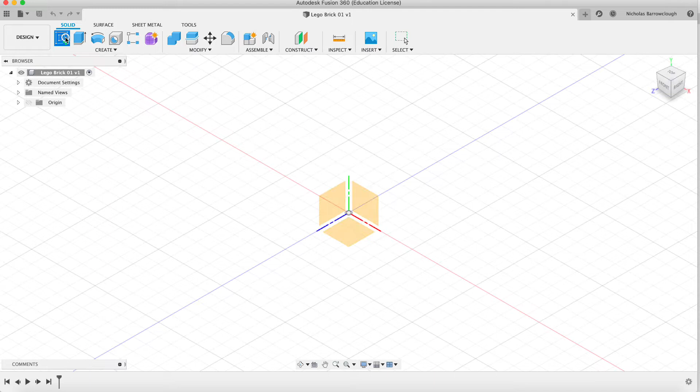So check the dimension 31.8 by 15.8. So we start with creating a sketch on our origin plane here, 31.8 by 15.8. And there we have our beginning sketch.

We've input the dimensions. You'll see it automatically dimensions it there for us. And this allows us to then do parametric modeling, because we can go in and we can edit these dimensions, and whatever we edit, it's going to have knock-on effects down the line. It's going to adjust everything else, so long as it's properly constrained and referenced here in the drawing. And you'll see what I mean by that as we go along.

So next thing we're going to need to do is position our circle here. So these are spaced at 8 millimeters by 8 millimeters. They are 4.8 in diameter, and it is 3.9 from the edge. So that stands to reason that if this is the center line here, we go 4 millimeters up and 3.9 in from the edge.

So we'll put some construction lines in. First of all, a center line going right down the middle here, like so, and we will turn this into a construction line. And then we need to go 4 millimeters one way and 3.9 the other. Actually, we don't need to make this all the way, let's just change this. We only need to go in by 3.9, which is the distance from the edge there, and then 4 millimeters the other direction, just to position this.

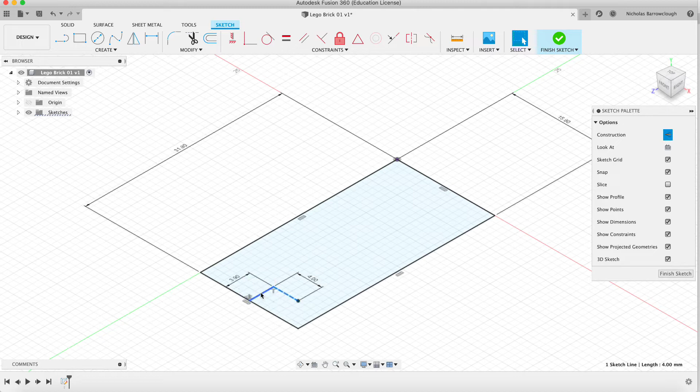So we don't need the construction line to go all the way, just from the center point here, and we go 3.9 in, and we go 4 up. We'll go the other way so it doesn't interfere with our dimension. It's fine, we just need the position of one of these. So we can turn these into construction lines also.

And we'll stick our circle here, and the diameter of that is 4.8. So we come over here and we go 4.8. There we have our first one positioned.

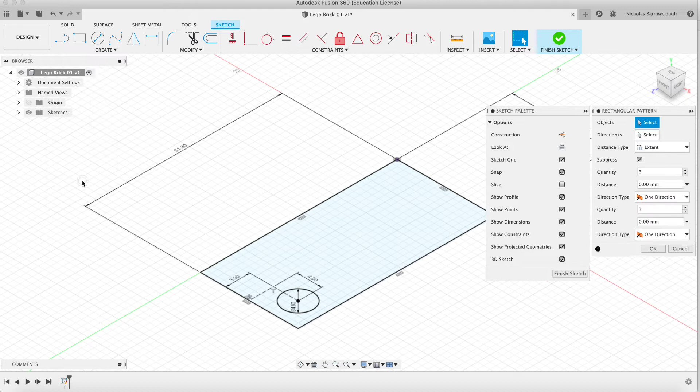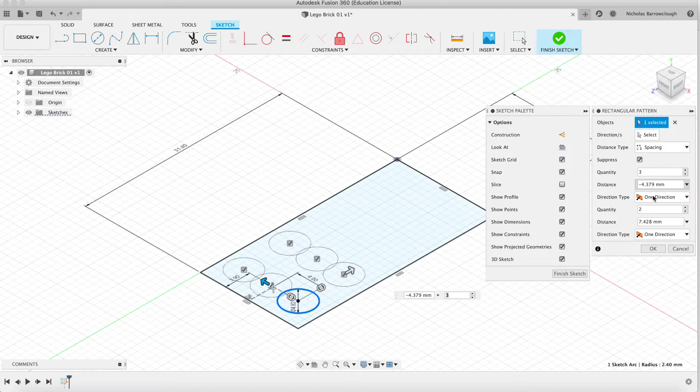Now we don't need to do this many times. We can use the rectangular pattern. We'll select this object and we choose the amount of times we want to do it. So we change our distance type to spacing, and we drag this out in this direction and in that direction. So actually we're going to want 2. Nope, other way, it's going to be 4 by 2.

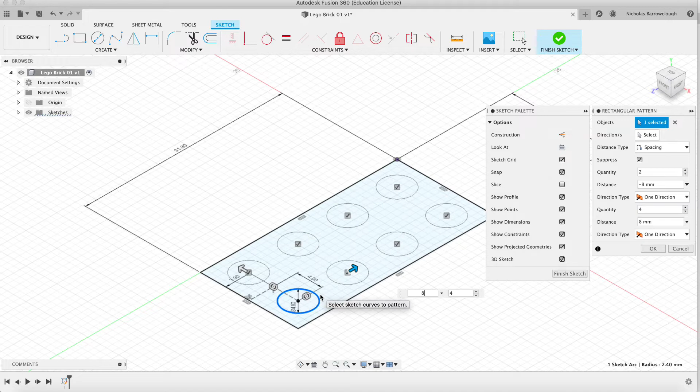We need to input the spacing. So the spacing between our circles is 8 millimeter center points. So this is going to be -8, and this dimension will be 8. Okay, so there we have everything spaced as we want it to be and positioned appropriately, the correct diameters.

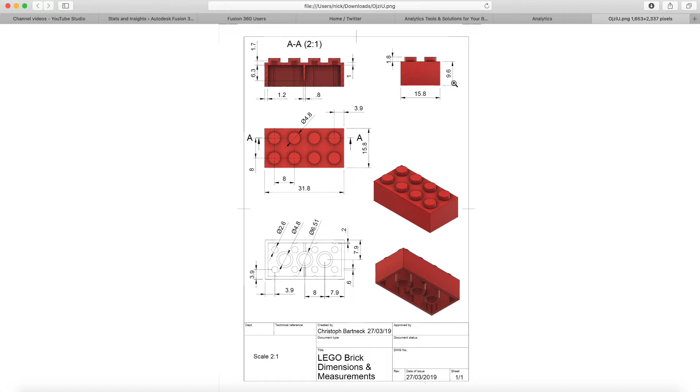Okay, so next step. Now we've basically drawn this, we are good. We're going to be extruding it up. Okay, so our height of our brick is 9.6, that's our height here. So we will go to Finish Sketch, Extrude, and we're going to extrude everything up here by 9.6. Done.

Now, I want to keep the sketch visible, because the next thing that we need to do is do this part here. Now this comes up by 1.8, but it should start at 9.6. Okay, so we're going to use our same sketch.

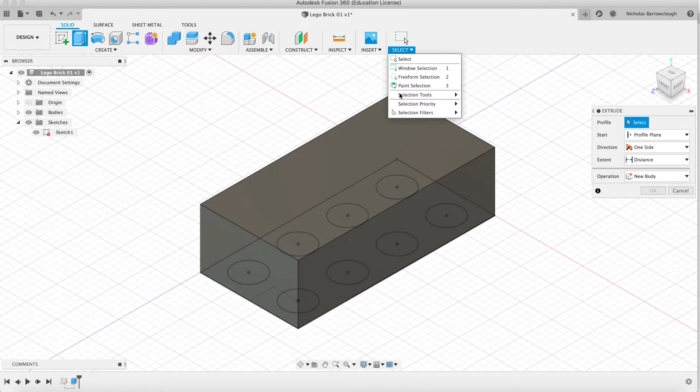Go to our selection filters and we turn off select all and just sketch profiles. So we're going to go through and select only these.

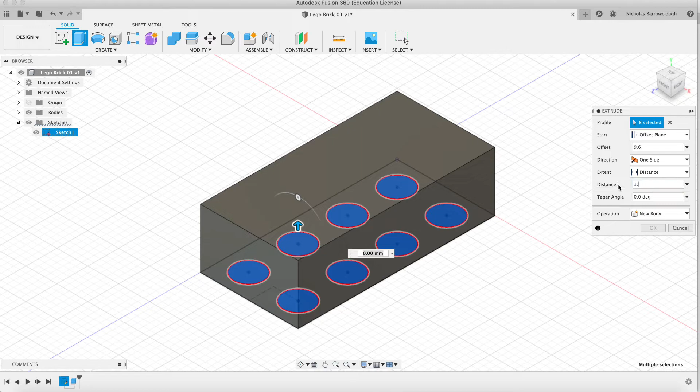We will choose to start at an offset plane, and the offset will be 9.6, and our distance will be 1.8. So that means we are not going to start extruding until this top surface here, and they're going to come up 1.8 in height. And we want join, okay?

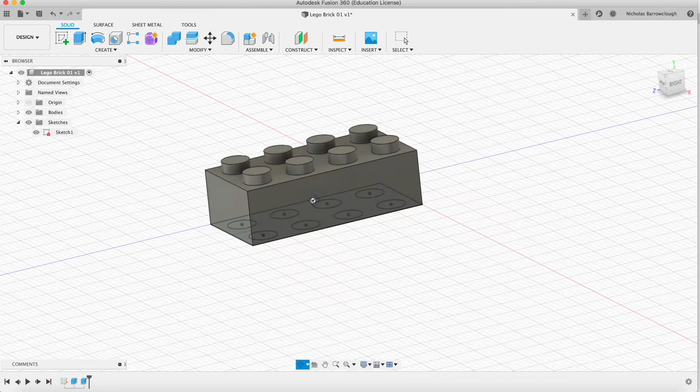Done. There's our Lego brick. Look familiar from when you were a kid? I hope so. Okay, so what other dimensions do we have to deal with here? So we've done our height, we've got our width, that's all correct.

We are going to be wanting to go from the inside measurements. Our wall thickness there is 1.2. Okay, so the first thing that we're going to want to do is use the shell command and shell this whole brick out with a wall thickness of 1.2. That's going to be our first thing to do.

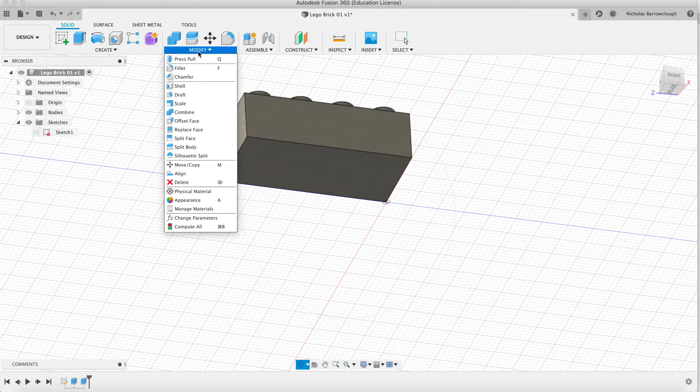So how do we do that? We flip this over, we rotate around, and we will go to our modify tool, and we'll go to shell. We select this face, that's the one we're going to remove, and our thickness is 1.2, and we go OK, and now we have a nicely shelled brick. See that?

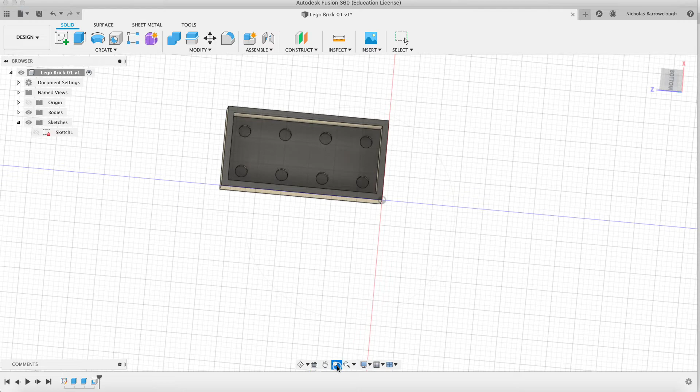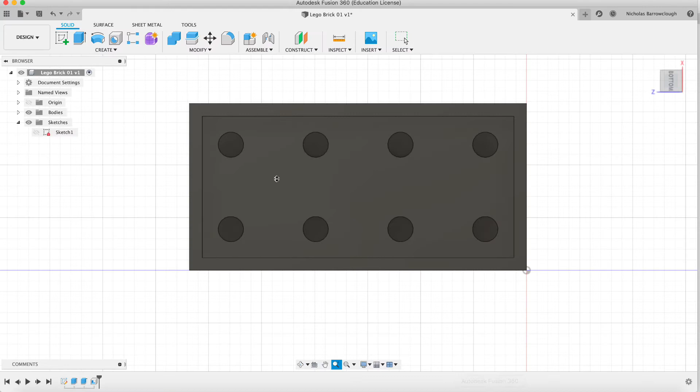And if this has been done correctly, our hole diameter inside here I think will also be correct. Maybe, let's have a look. So that's 1.2 thick. Our diameter was 4.8. If you take off 2.4, it should be a 2.4 diameter inside. Let's have a look at this circle here, and you see the diameter there is 2.4. So there we go. That is all correct. Okay, there's our basics of our Lego brick there.

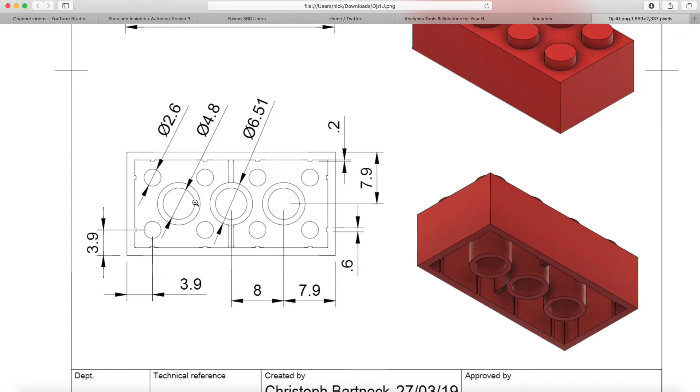Now, inside of the brick we have some other elements. Okay, so we have these that come down. If we zoom in there, you'll see we've got 1, 2, 3 circles coming down, and these have a diameter internal of 4.8, because these are going to fit in between here, when these bricks are interlocked.

Alright, so first thing, we're going to need to draw these 3 circles in their correct positions. 7.9, and 7.9 is going to be the position of our first one. Okay, so what I'm going to do is put it onto this same sketch.

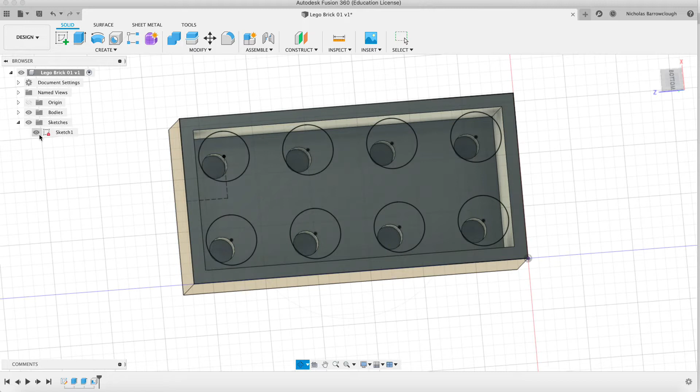So we edit this sketch, and I'm going to put it at this side here. So we're going to need to create a new construction line, and this construction line will start in the center point and will come out 7.9. 7.9 in from the edge, 7.9 to the middle. Okay, so we just find our center line here.

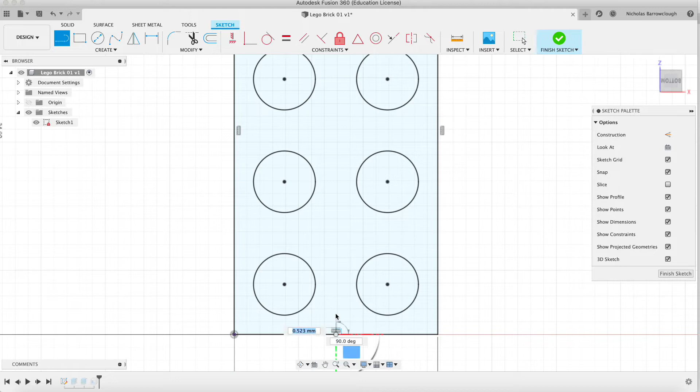And we come in 7.9, and make this a construction line. And now we need a circle which has an outer diameter of 6.51, okay, and then inner diameter 4.8. So 6.51 for the outer, 4.8 for the inner. So we'll start with the outer circle. That's 6.51.

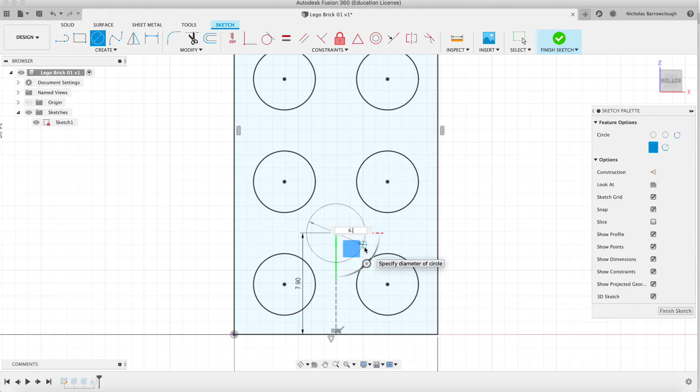The inner diameter is 4.8. And you'll see how that outer diameter just kisses the tangent of these. That will be a perfect fit.

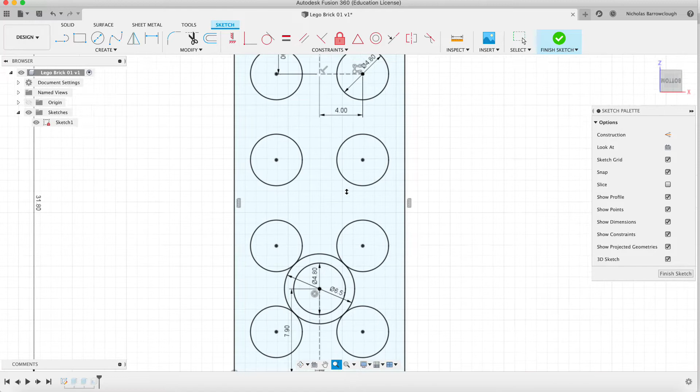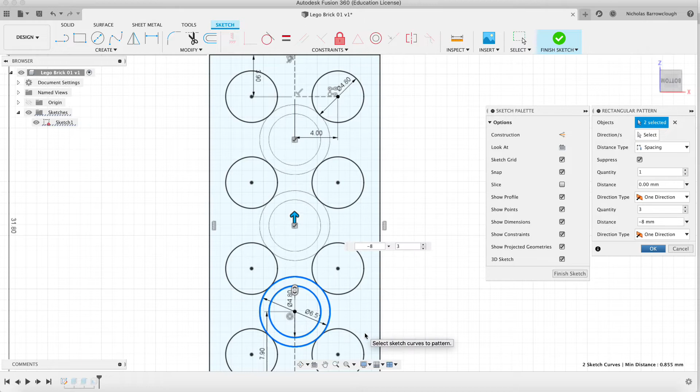Okay, now this needs to be copied 3 times. So we will create a rectangular pattern. We're going to want both of these, and our spacing should be 7.9. Okay, no, 8. 8 will be the spacing. Okay, so we set this spacing to -8. Everything should line up properly for us.

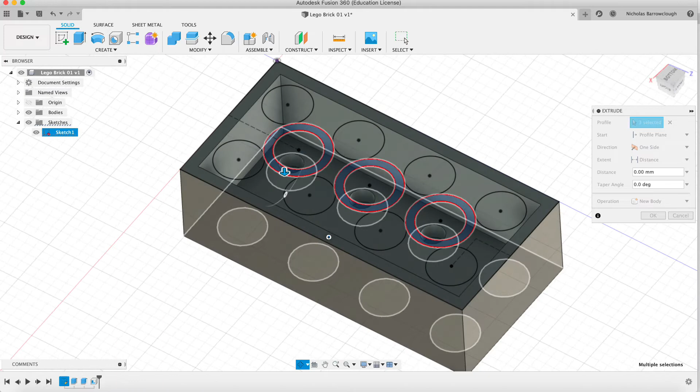Okay, so we finished the sketch. We're going to grab this, this, and this, and it's going to be extruded. If we turn off sketch profiles, it's going to be extruded as far as this face here, and it's join. Okay, now we can hide our sketch. There we have the inside of our Lego brick.

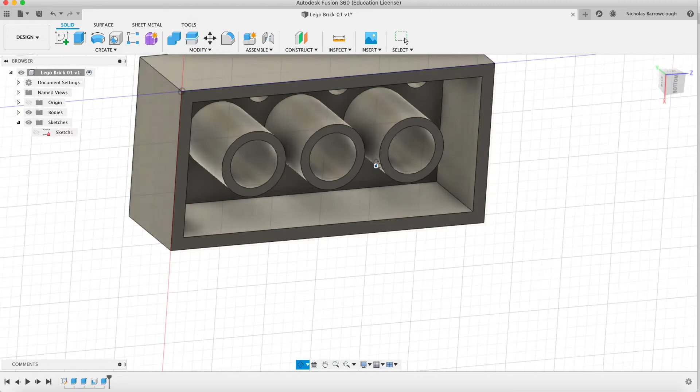So you see, all of this is being done from one sketch, so we're not cluttering up our workspace too much, but one sketch with everything we need on it. So, in the middle here, we have this little tab that comes out and joins, and its thickness, we're not really given. I don't see the measurement of the thickness of that anywhere. So that might be the one dimension that we're kind of missing here.

But I will hazard a guess. Our wall thickness was 1.2, and yeah, we do have the measurement of that here. It's 0.8. Excellent. Okay, so 0.8. Half of 0.8 would be 0.4.

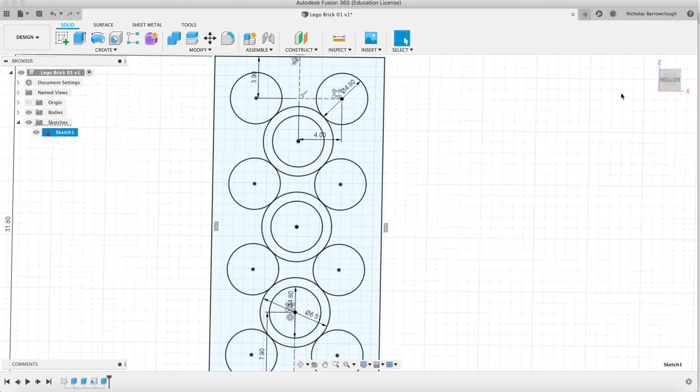So we go back to our sketch, edit this again. Construction line out to the edge here, another on the other side. And now we will offset 0.4 in that direction.

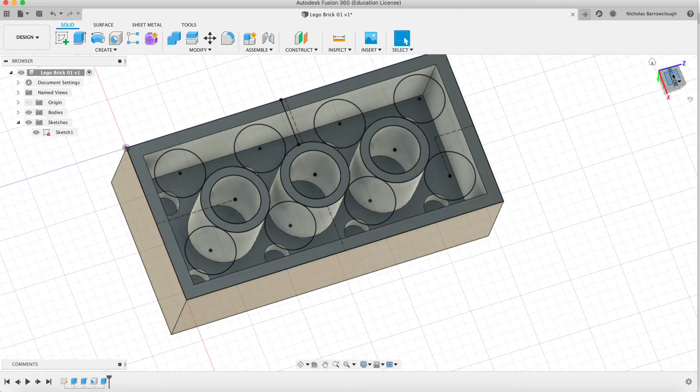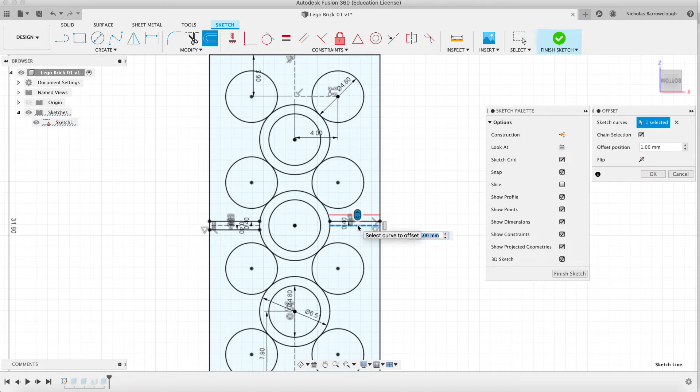Whoops, I shouldn't have gone to finish sketch, sorry about that. And minus 0.4 in the other direction. And then the same on this side. 0.4 and minus 0.4 in the other direction.

Okay, and you'll see that when we offset this, because our construction line is close to the tangent there, it hasn't joined. You notice? Because it's just offset this line exactly as it is. So we need to make a little adjustment here.

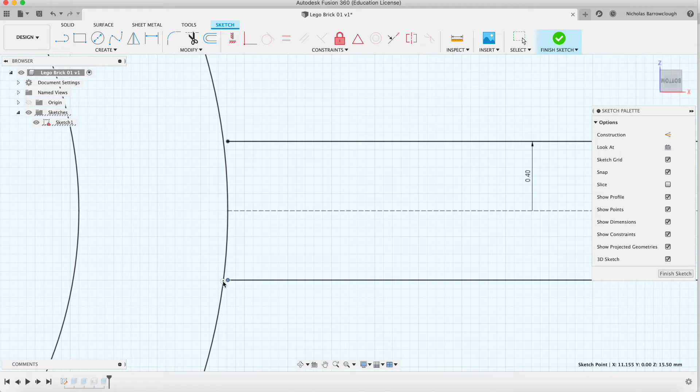Drag this if we can. Delete coincident. And we drag that down to the tangent here. Okay?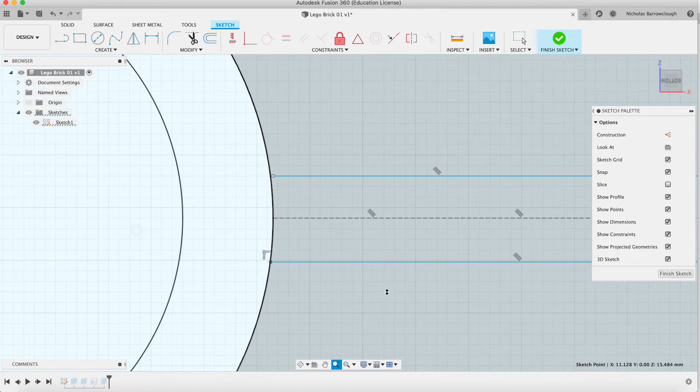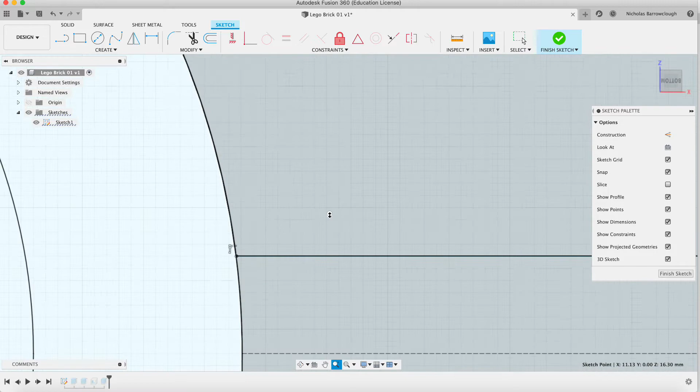And the same on this side. Delete the coincident, and we'll drag that to there. Now it's properly constrained, okay? Join to the tangent on that side. And then we do the same on this side.

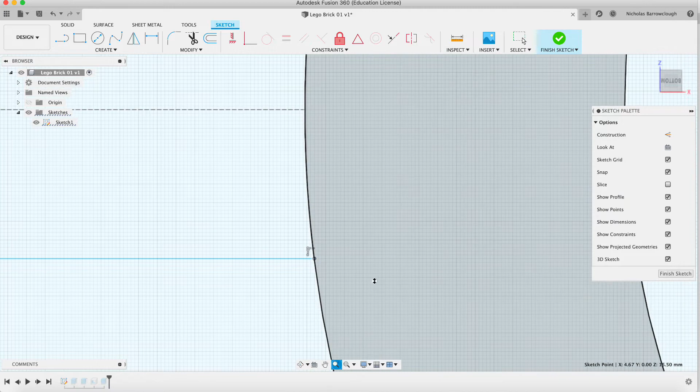Delete coincident, drag that out to there, and the same here. Okay, so that being done, finish sketch.

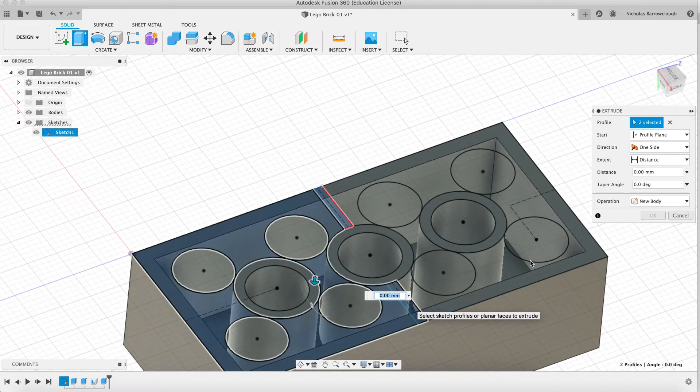Now I can grab this, see here, I can extrude this down, turn off sketch profiles, so I can go as far as that surface there, and it will be joined, not cut, okay?

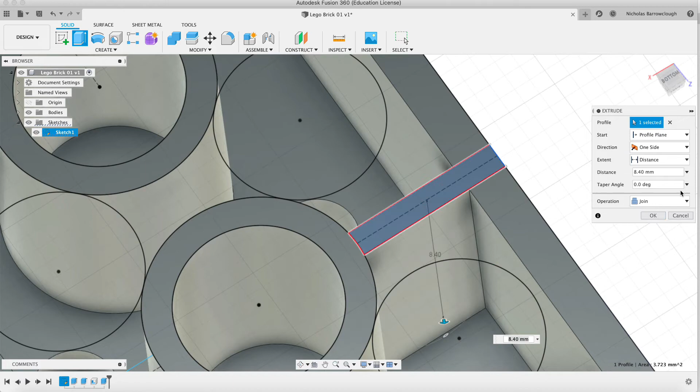And then the same on this side. Seem to have a slight problem here with the sketch. Let's go back in and edit the sketch again.

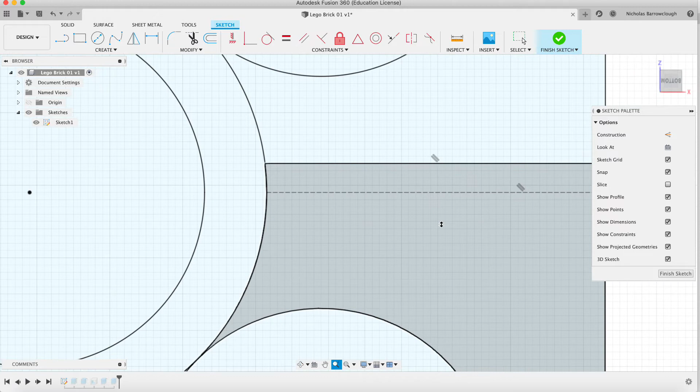Another option, rather than using the offset, this would be another way of doing it. As we know, it's 0.4 in each direction. I could just make a construction line out here, which is 0.4. And then just go straight from there to the tangent, like so. And I can do the same in the other direction.

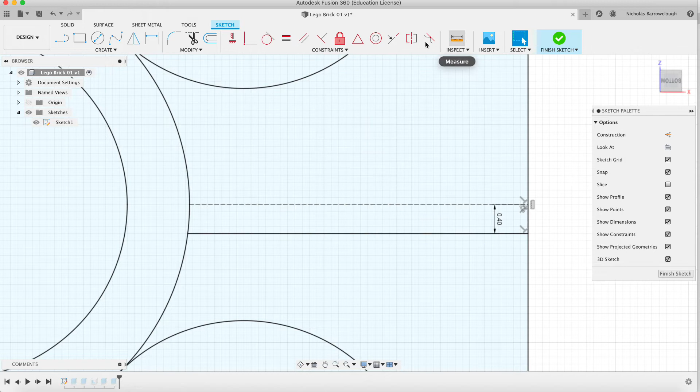Or I can offset this by 0.4. Okay, that gives us a proper geometry there now, I think, that we can extrude. Yes, okay. So,

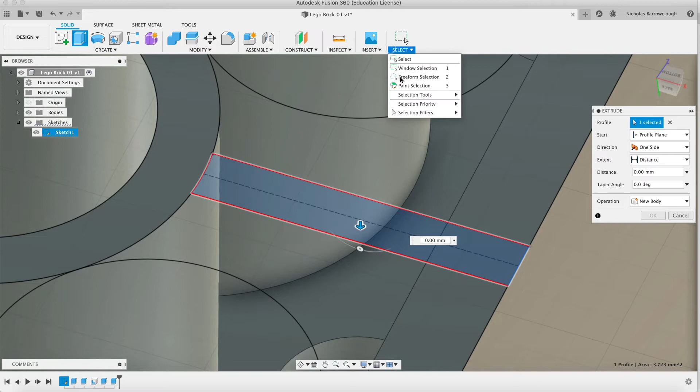Extrude this, same as before. Change our selection filter, so I cannot select the sketch. We extrude it to there. Join. And we're done. Okay, now hide our sketch again.

We're almost there. Okay. All we need to do now is add these minor features here, here, here, along the side there. So we have 1, 2, 3, 4 of these. They stick out 0.2, and they're centered on our circles there, which is 3.9 centers. Okay, so 3.9 in.

We're going to have this little 0.2 protrusion, and they're 0.6 wide. So it's 0.3 from either side of the centers. So the first thing we're going to want to do is come in 3.9. Okay. So go back to our sketch.

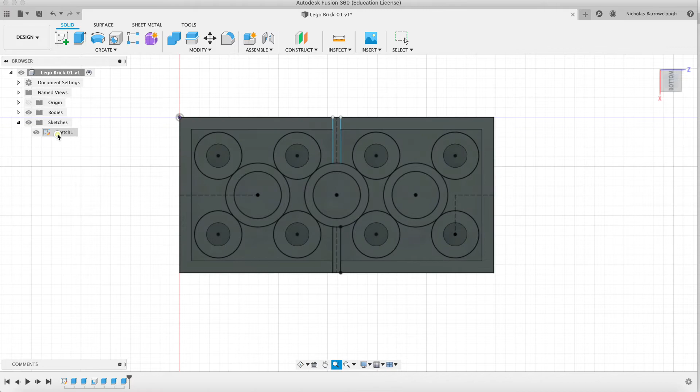Okay, we'll do it on this area here. Okay, so 3.9 in, 0.6 wide. So if it's 0.6 wide, we take 0.3 off of 3.9, and we are at 3.6. So at 3.6 in is where we're going to start. Okay, so we need a construction line that comes in 3.6.

We'll change this to construction line. Square, rectangle, and we're going 0.6 by 0.2, 0.6 by 0.2. Okay? So that would be 0.6 by 0.2.

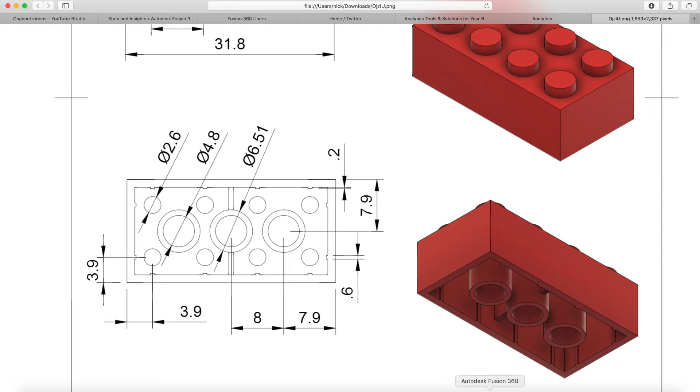Now, problem with this is it also needs to shift in by the thickness of the wall. Okay? And our wall thickness was 1.2. So 1.2 plus the thickness of 0.2 will be 1.4. So let's adjust this dimension here.

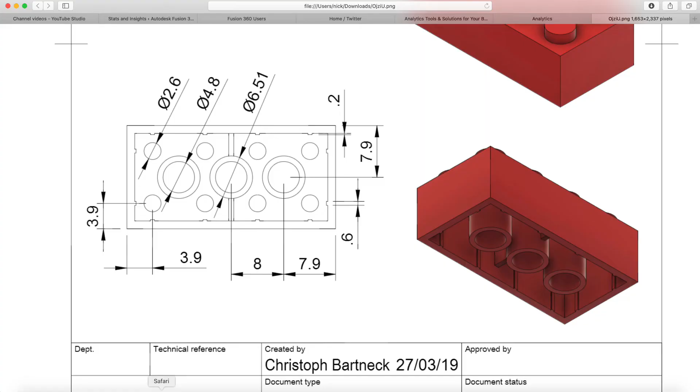The 0.2, we adjust it to be 0.4. 1.4, sorry. So that's all correct. Let me see, 0.2. Thickness of a wall is 1.2, so it would be 1.4. I believe that's correct.

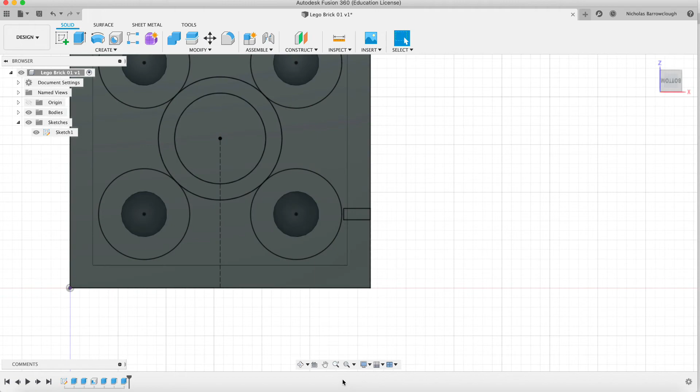Okay, so we go to Finish Sketch. Now, I'm going to put a line on there also, so that we're not extruding this whole thing. So let's go back to Edit the Sketch. So actually 0.2 from the end.

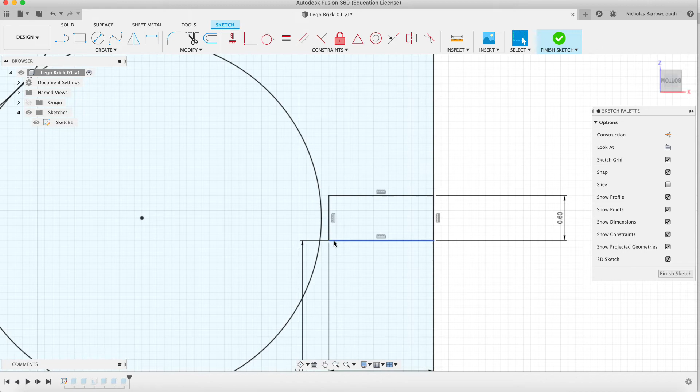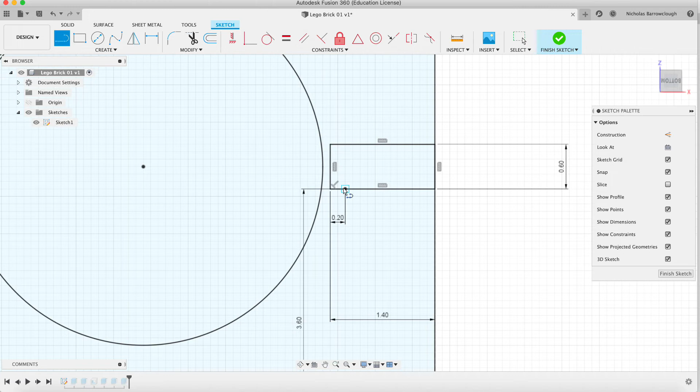Change that to a construction line. I'll put a line straight across. Okay, so that's our little protrusion.

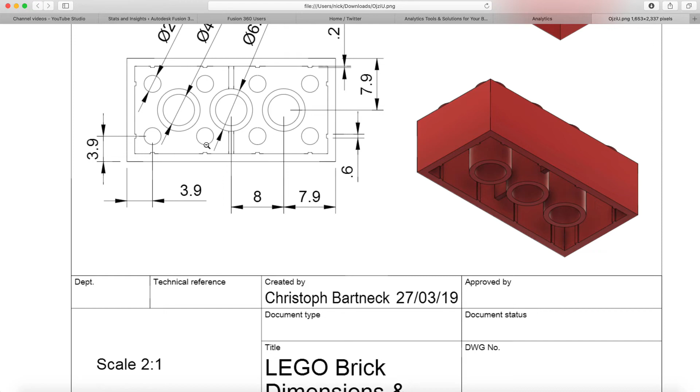Now again, we're going to want this copied. How many times? 1, 2, 3, 4 times. Okay, 4 times. And we are probably going the same centers as the others, so I'm guessing it's going to be 8 as well, because we want the center on each one of these. Okay, so we can do the same again. We can create the rectangular pattern.

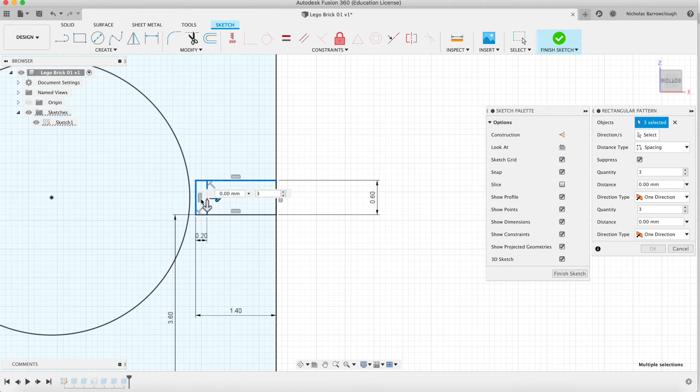Basically going to select these edges, okay, it's going to be repeated in this direction, and it'll be repeated 4 times, 1 time that way and 4 times this way. Okay.

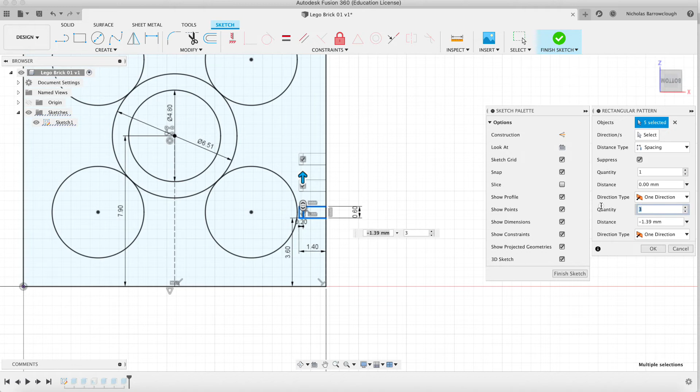Now, distance of this will be -8. Oops. 4. The distance of -8. Okay. So we're done with that.

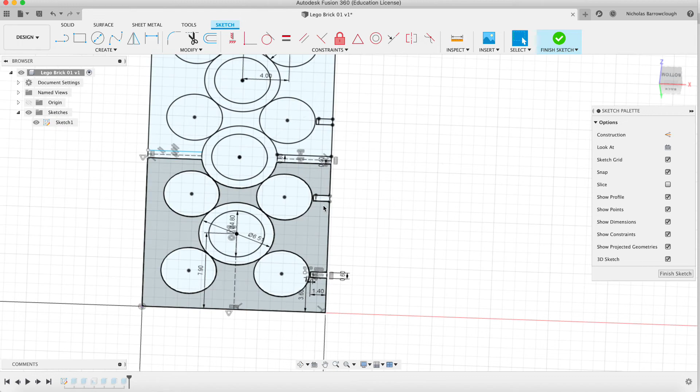And then we're going to need the same on the opposite side. It's going to be mirrored across there. So let's select all of this again that we just did. And we'll mirror it over there. We'll mirror this one.

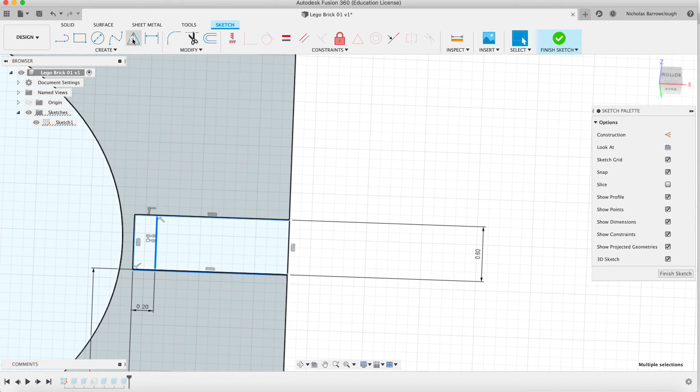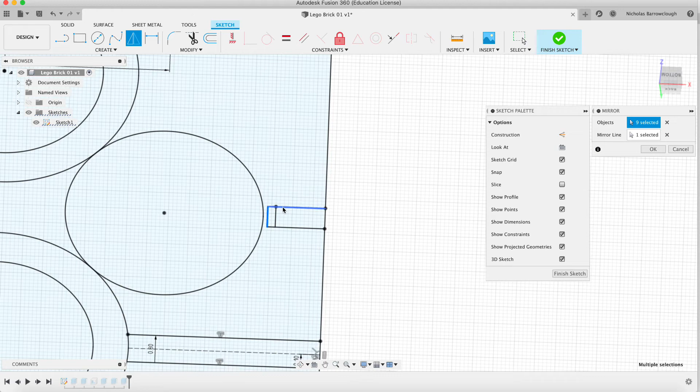This edge, this edge, this edge, and this edge. Mirror. Now mirror line will be the center line. I see it's going to get copied on the other side, okay? For our objects, again, select here, okay. We should now have it on both sides.

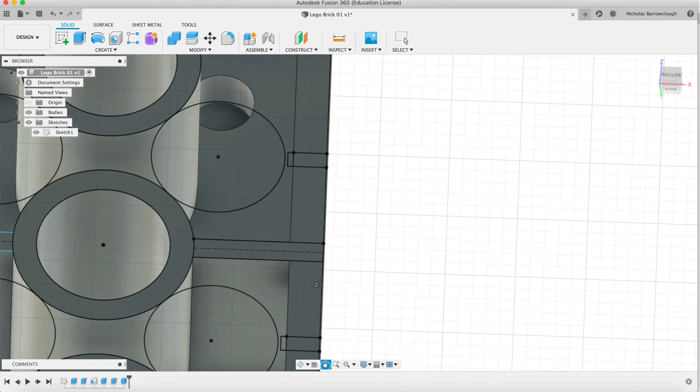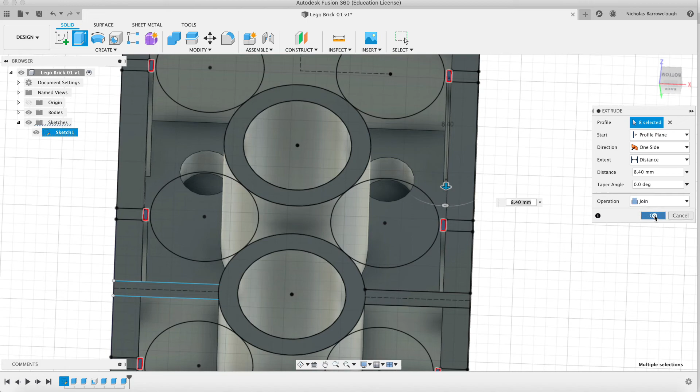We go to finish sketch. Now we can extrude up those areas. So we select here and here, here and here, this one, and this one. And then we turn off our selection filters, we turn off sketch profiles, and again we want to extrude as far as there. It's on join, go OK, hide our sketch, and there we have our

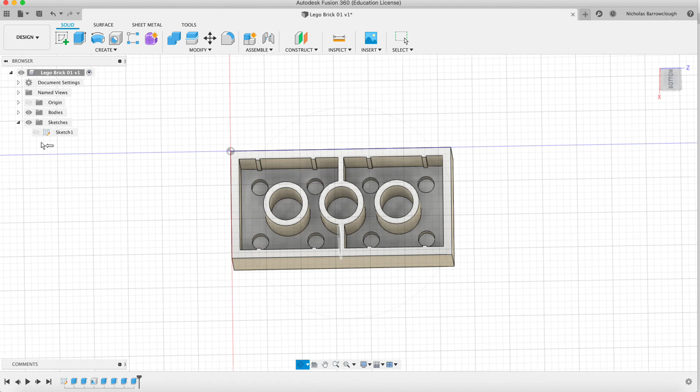internal grooves there. Now we just need them on the ends, so we're going to repeat the same procedure again. The 0.6 wide, 0.2 deep, and this is centered at 3.9 from our edge, okay? 3.9 from either side. So we're going to go back in and edit our sketch.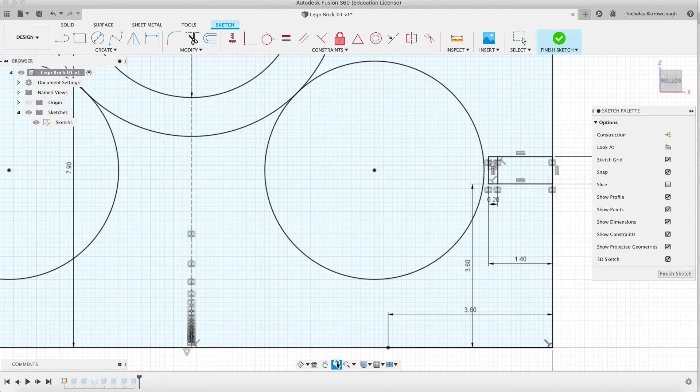So it's 3.9 and they are again 0.3 wide, so off our 3.9 we take the 0.3, so it's going to be at 3.6 starting point. Same like before, but in this direction 3.6. Make that into a construction line. 3.6 there. Get rid of that. Whoops. There it is.

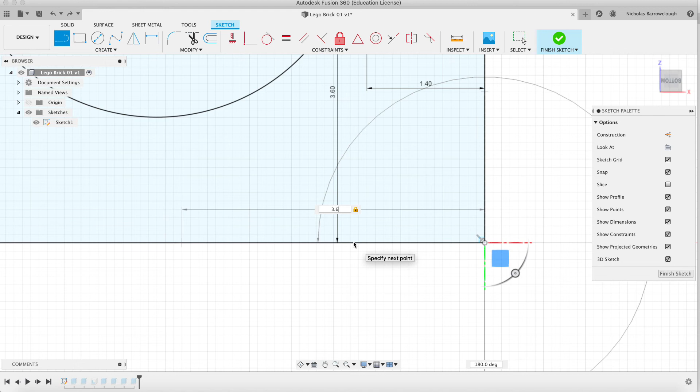Go again. We'll go 3.6. Select that and turn it into construction line. Okay, so 3.6 in, same as before, and then we make this rectangle 0.6, 0.2, 1.4. Dimensions already there. Okay, so 1.4 by 0.6.

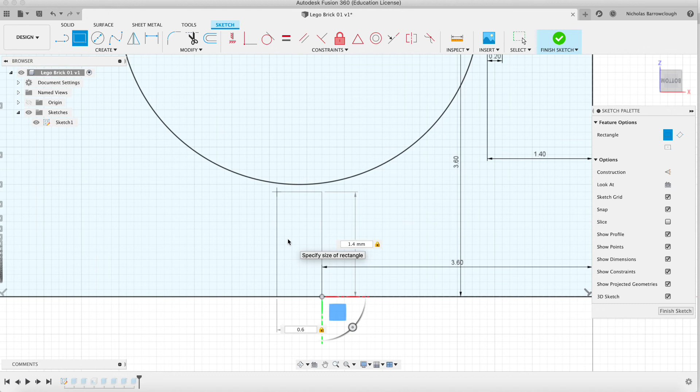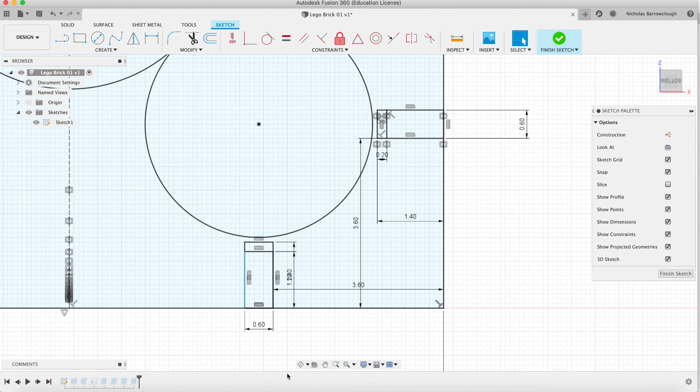Then create another rectangle inside here. But instead of 1.4, it's going to be 1.2. Give us our 0.2mm bit that sticks out. Okay? And then it's going to be the same from the opposite side. Right, same from the opposite side. 3.6.

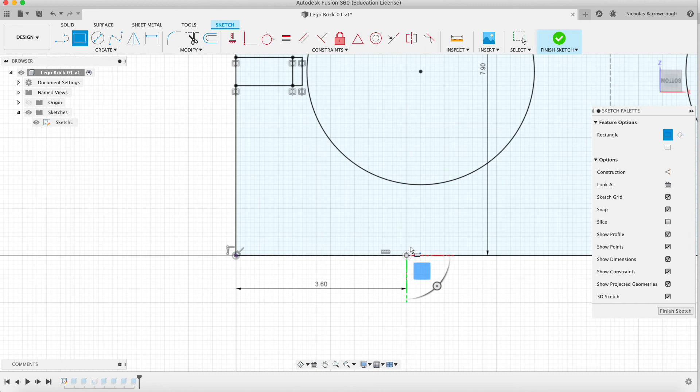Change that to a construction line. And then it's 1.4 by 0.6. And again, it'll be 1.2. Okay. And finally, we're going to mirror all of this again, but to the opposite side.

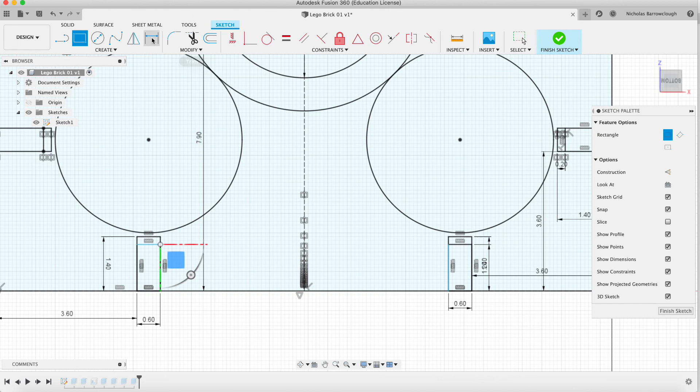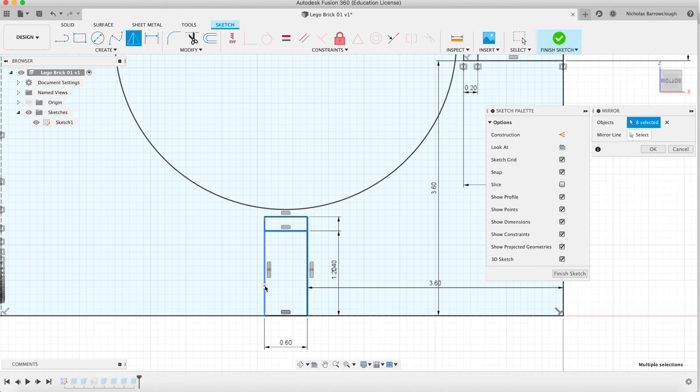So we select all of our edges here. Those are our objects. Mirror line, center. You should see them appearing over there. Excellent. Finish sketch.

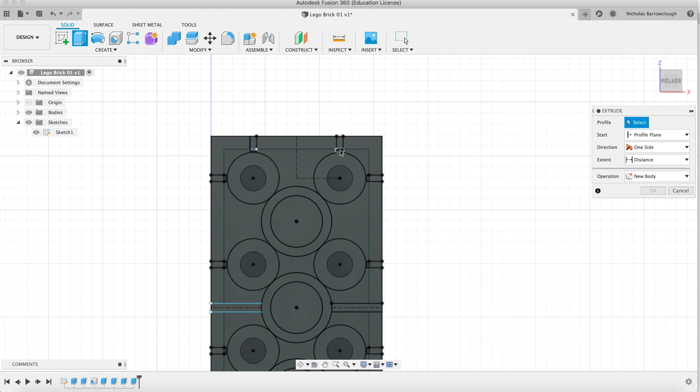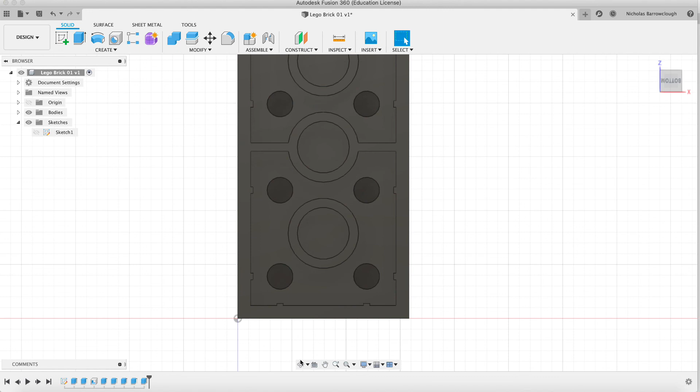Show the sketch, and then we're going to extrude this and this. This and this. Selection filters. Turn off sketch profiles. Select our surface here. Join. OK. Turn off our sketch. And there we have our finished Lego brick.

Ta-da! Congratulations. And thank you to Chris Bartneck, who drew this original drawing that we're using as our reference here, whoever he may be. There we go.